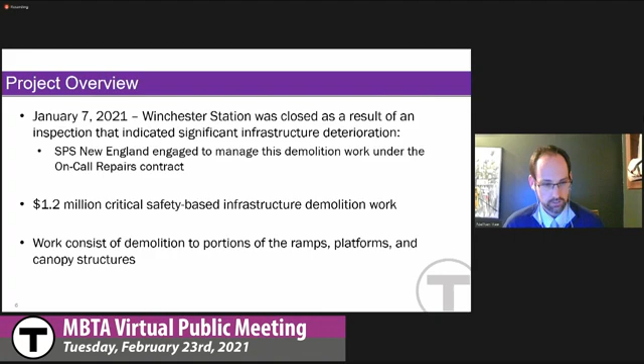And the main scope of this demolition phase of the work involves demolition of some of the ramps, some of the platforms, and all of the canopy structures at Winchester Center. I'll talk a little bit more about that later.

So that's a bit of the why, a little bit more explaining why we're doing this demolition work. The MBTA had recently undertaken bi-weekly inspections at Winchester, starting late fall last year. Of course, most people are aware of the serious nature of the deterioration at Winchester. The station was built in the 1950s with no serious renovations happening since that time. There's been rusting, falling of concrete. The station no longer meets any sort of accessibility requirements.

And so that, and also due to the inspections that we were undertaking, we decided that it was, out of an abundance of caution, best to close the station and start demolition work.

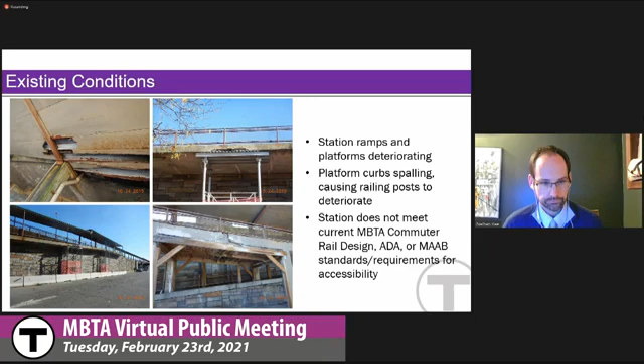Well, what are we doing in this phase of the project? We have undertaken pre-construction surveys of local buildings. We have implemented the traffic management control plan. We have implemented the pest control plan. We have installed temporary fencing in the areas of Laraway Road, Aberjona parking lot, as well as the Waterfield parking lot.

And we have started the initial phases of the demolition of the ramps, platforms, and canopies. And of course, the station is currently closed and will remain closed during demolition, as well as through into the construction project happening in the fall.

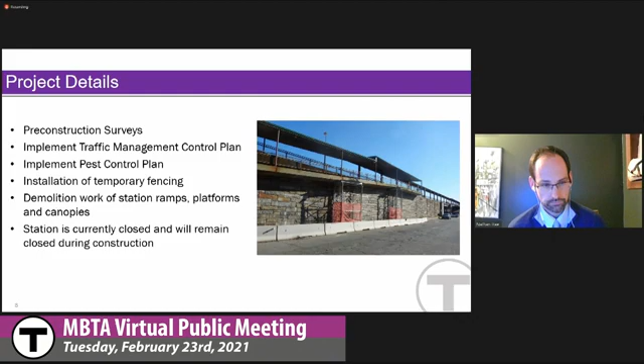A little bit more about the project details and what exactly we're doing at this phase of the project. I'm going to take you through some elevations that will be familiar to most people on the call, and just to kind of explain in a little bit more detail what you're going to be seeing as we advance through the demolition phase of this work.

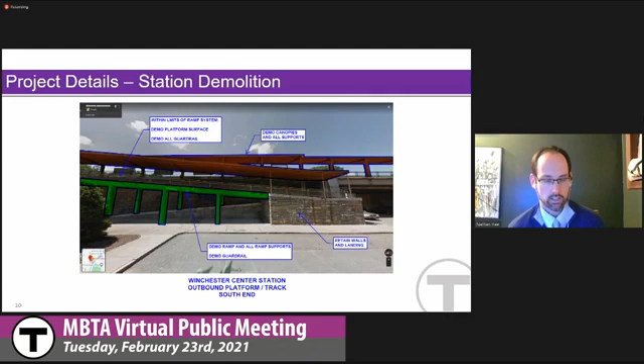Over Waterfield Road, looking to the west, we are removing the canopies over Waterfield Road. The platform will remain in place and will be part of the scope of the new build contract happening this fall.

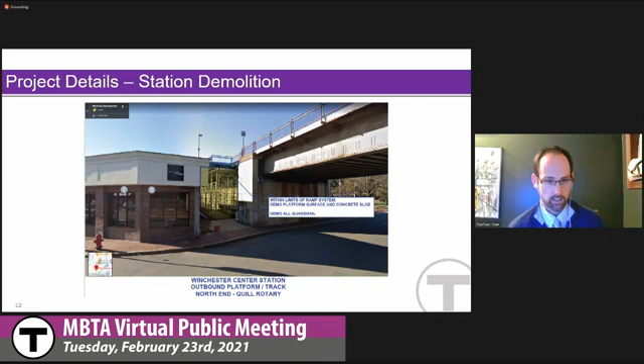This is at the Quill Rotary behind Thompson Street. You see a section of ramp and overhead platforms that will be coming out. That ramp will be staying in place for now, but we are removing the section of overhead platform in this phase of the project.

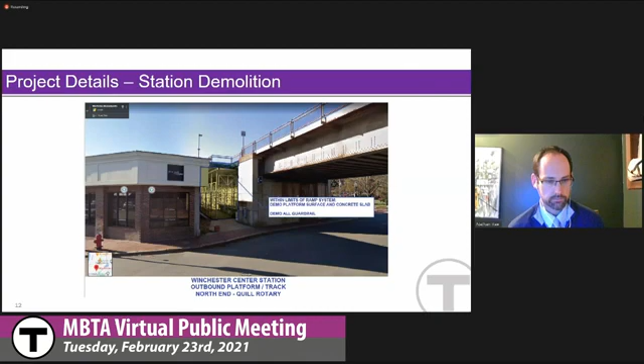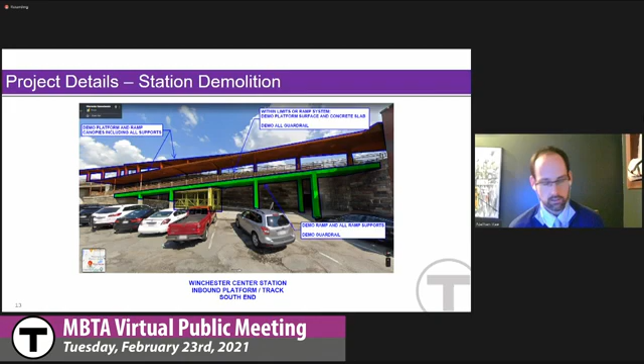We're back down at the Waterfield lot now. We are removing all the canopies again, as well as the sections of ramps that are overhead. So all that area you see in green is coming down - canopies over the ramps and platforms are coming down, and the remainder will be left to the new build project happening later this year.

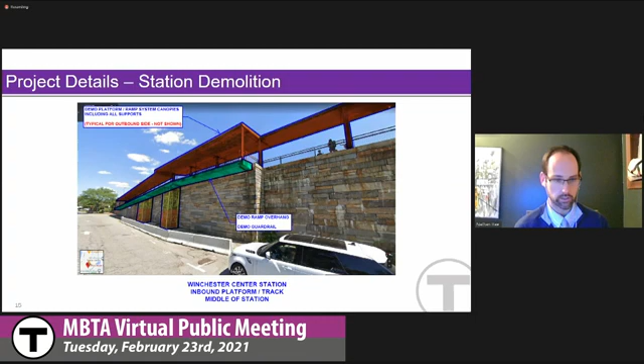Over on Laraway Road, just past Waterfield Road, all the canopies are being removed in this project. A little further down, you'll see yet again more canopies and a section of ramp that is cantilevered over Laraway Road there - that'll be removed in this demolition phase. Of course, all that temporary shoring work you see there will be coming down and being removed as well.

End of Laraway Road at Quill Rotary, we are removing the section of platforms overhead and the canopies over the ramps there on the right. And that concludes the scope of what we're doing in terms of the demolition in this phase of the project at Winchester.

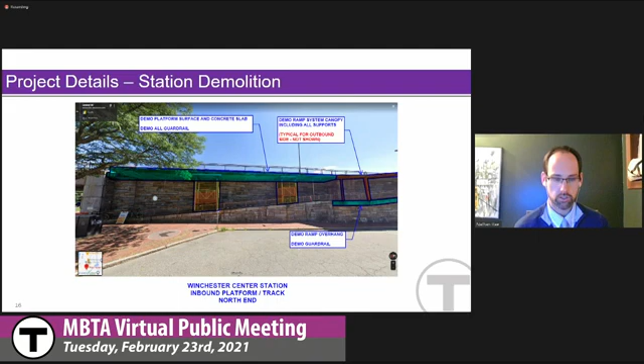Impacts - of course there are service impacts already mentioned. Trains will continue running, however they're not stopping to board and alight at Winchester Center. The local bus stop at Winchester Center is currently being bypassed, so we invite any patrons who normally board there to go to Main and Vine Streets or the closest other bus stop that may be in their area.

Other project impacts include those related to construction. These may include noise, dust, vibration impacts, other construction related impacts due to demolition work, as well as associated traffic impacts due to construction activity. So we'll talk a little bit more about those.

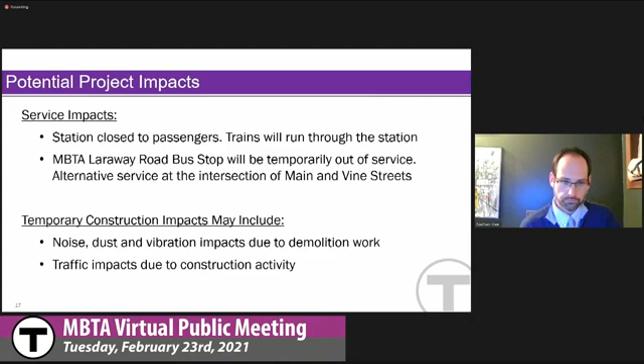To help mitigate some of these impacts that are common to every construction project, we've undertaken pre-construction surveys as mentioned previously. For communication purposes, we've set up a construction hotline where anyone with a concern about construction can call that number, which will be available at the end of the presentation. We've also set up vibration monitoring as well as noise monitoring, which has been taking place in the past few weeks to get baseline readings and understand what the vibrations and noises are during a normal day prior to demolition.

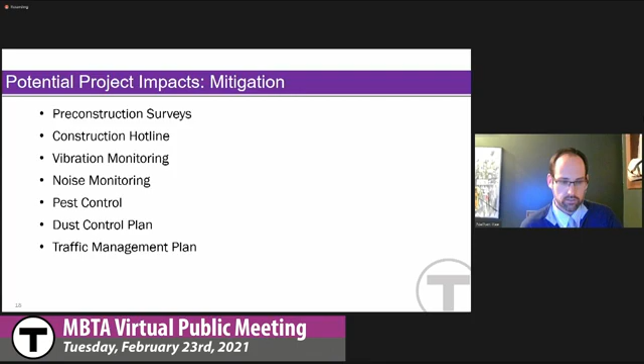We have already set up pest control and undertaken the early stages of that plan. We are ready to implement a dust control plan. And we have started our traffic management plan, as you most likely noticed in downtown Winchester right now.

So a little bit about the when. I know people are concerned about how long this work is going to go on, and so we'll talk a little bit about that now. We've broken down this demolition phase into 4 phases itself.

Mobilization - we started going on site in early February. This is when we started the traffic management plan, set up our pest control plans, some fencing, and done our preconstruction surveys as well in that phase. That phase is now complete.

We are in phase 2 of abatement. This is the demolition work that has to happen separately before what we are calling heavy demolition work in phase 3 - this is really the meat and potatoes of the demolition work, the removal of the ramps, the canopies, and the platforms. Abatement involves removal of the roofing material on the platforms, as well as the paint on the columns, as well as the steel and other railings that are at the station right now.

Final phase is demobilization, so we are clearing up and shipping off site. We are anticipating to be off site by the end of May.

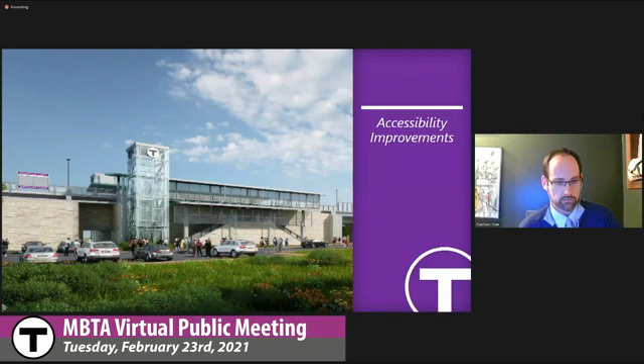A little bit about the project goals and scope for this phase of the project. We have certain goals, things that we want to accomplish in each of our construction projects at the MBTA, and then how do we carry out those goals and what are the specifics - that's the scope of each goal. So our first goal is to increase safety.

For the final build of the project, how are we going to do this? Well, we're going to install permanent and emergency lighting. We are installing security cameras at the platforms, as well as passenger assistance telephones.

We want to, as a goal, increase accessibility. Currently, the station, when it was open, was not accessible. So this new build will see two fully accessible high-level side platforms, covered stairwells, wayfinding signage, new platform canopies, benches, new elevators at the south end, and an additional elevator that's been added.

Another goal is sustainability. We are using new fiber reinforced polymer composite panels. So what does that mean? Well, these are lightweight, high strength-to-weight ratio platforms that are resistant to, for example, the deterioration that we've seen in the concrete there. This is a new material that will be resistant to weather and de-icing chemicals, and we're anticipating that this will give that station a bit of extra longer life.

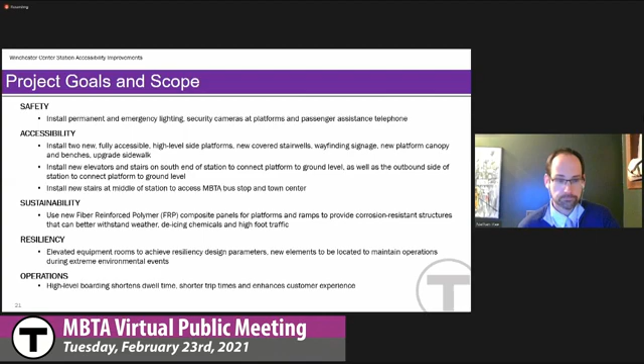This is the proposed future station plan. This may be familiar to some people. There are some slight changes from when we last met in March of last year. The Quill Rotary is on the right, so that's the north end of the station, and then Aberjona Waterfield lots on the left side of the screen.

So the inbound track, that's the one on the top side, that has not changed since we last spoke. There is an elevator down at the Waterfield lot with stairs. Over on the Laraway Road section of the inbound platform, there are stairs and a ramp. What's changed in this layout that some people may not notice is that formerly, in the previous design, there was a pedestrian bridge that extended from the outbound platform over the Quill Rotary down to a ramp on Shore Road.

Subsequent to our last meeting in March, it was decided to change this plan. You'll now notice that the ramp on Shore Road has been moved down to the Aberjona parking lot. We have added an elevator behind Thompson Street at the Quill Rotary with a new set of stairs. We needed to keep a ramp to meet accessibility concerns, and we want to provide redundant means of access for accessibility concerns. So these changes really constitute the majority of what you had seen previously in March.

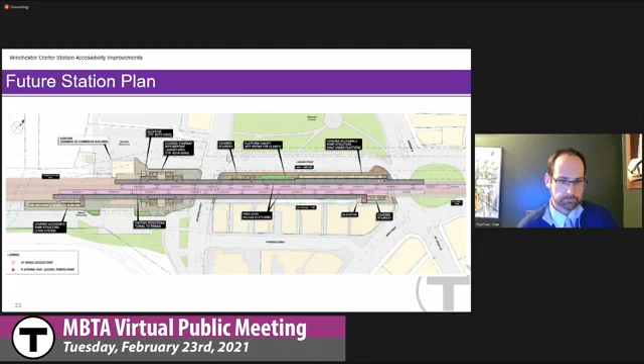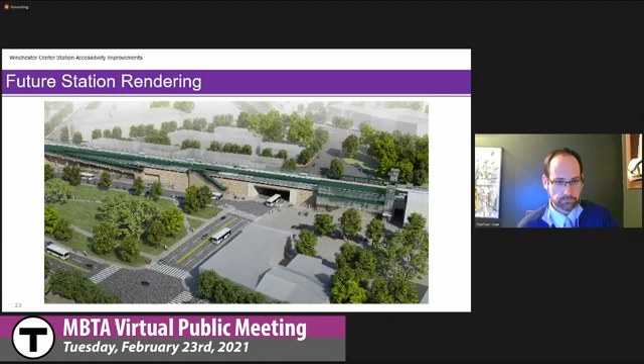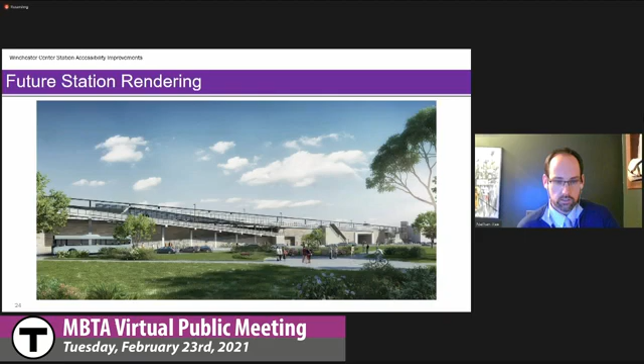This is again from the town common, looking at the elevation of Laraway Road, where the current bus stop is. You see the ramps there, canopies, and a stairwell at the corner of Laraway and Waterfield.

So, transit alternatives during construction. We know that our patrons, prior to COVID, were concerned about how they would continue their commute during construction. A few options are available. There's a local bus, Route 134, that runs through Winchester and connects to the Orange Line. Of course, there's Wedgemere Station also in Winchester. So we invite our patrons to choose either of those options if they are going into Boston.

There's the option of walking, biking, or dropping off if you intend to go to Wedgemere Station. During construction, we are planning on supplying additional bike storage at Wedgemere as well, just to make sure that people who choose those options have that necessary availability.

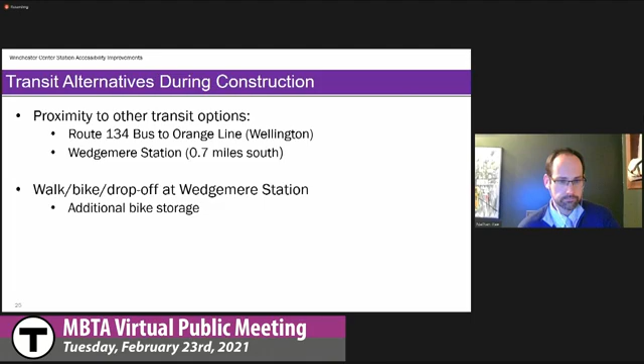We realize there are parking impacts to what we're doing. Senator Lewis said this is right in the middle of your downtown, and we are fully aware of that. The parking impacts are a very sensitive issue. We understand that parking downtown plays a very important role for businesses in downtown Winchester. The final build project will be taking up a similar amount of parking as you currently see for the demolition phase of the work.

The Aberjona parking lot will have considerable spaces taken up. Laraway Road is also very key for us in carrying out the work that we need to do. We need to work from Laraway Road to build the infrastructure behind Thompson Street, because it's so tight back there. There are some areas of parking impacts that are only for the duration of construction.

I'm talking again about the final build project, the accessibility improvements project happening later this year. Laraway Road will be impacted most of the time, as well as the Aberjona and Waterfield lots. There are some sections on Waterfield Road that you see there. We anticipate those being isolated takings to perform overnight work.

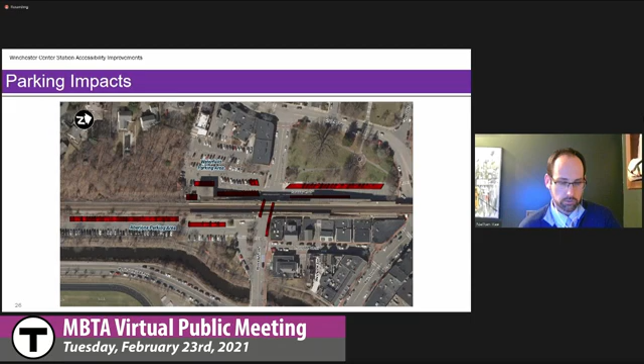What to expect during construction. We'll again be undertaking pre-construction surveys. This is a new contract with a new contractor, so we understandably have to take new surveys to understand the existing condition of the buildings prior to construction. A note about parking also, when speaking about service impacts - we are trying to get parking, and we are anticipating a return of ridership increasing more in the fall as hopefully things start to open up again.

We're looking at Shannon Beach. We're in talks with DCR, by the way, to try to find some parking spaces down there in anticipation of more patrons choosing Wedgemere Station for their commute.

So, what to expect during construction: pre-construction surveys, and again more mitigation of construction impacts, like I mentioned for the demolition project. We will have field personnel on site - MBTA field staff, resident engineers, and field inspectors. We will have the communication resources I previously mentioned - construction advisories, updates, our website, our hotline, and our email address.